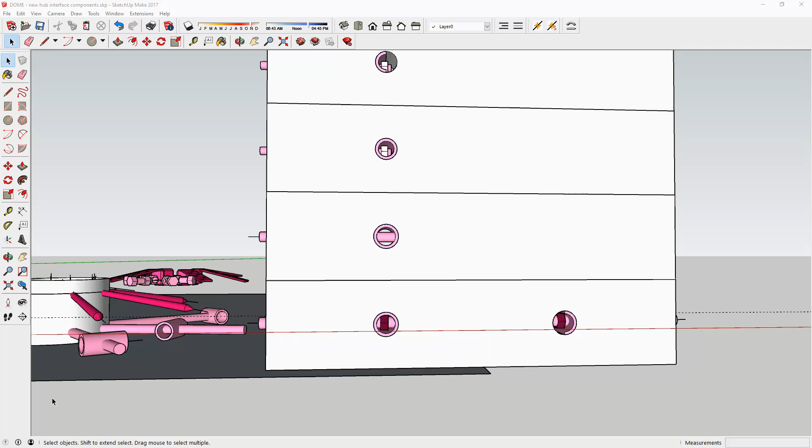Well, do you like my wall? It's not actually a wall, it's some sections of framing stacked on top of each other with representatives of the lower assembly components.

I posed the question to myself, is 12mm rod overkill? The answer, of course, is always going to be yes, but it also affords the aspect that if I want to make larger domes, I can, and why not try it with the larger dome type components that would be necessary. That was kind of what I was thinking. Other than that, it was just that I had some 12mm rod out in the garage and I was fiddling with it, and I thought, oh well, when I make my models I'll use 12mm rods. That was about as deep as my thought process went initially.

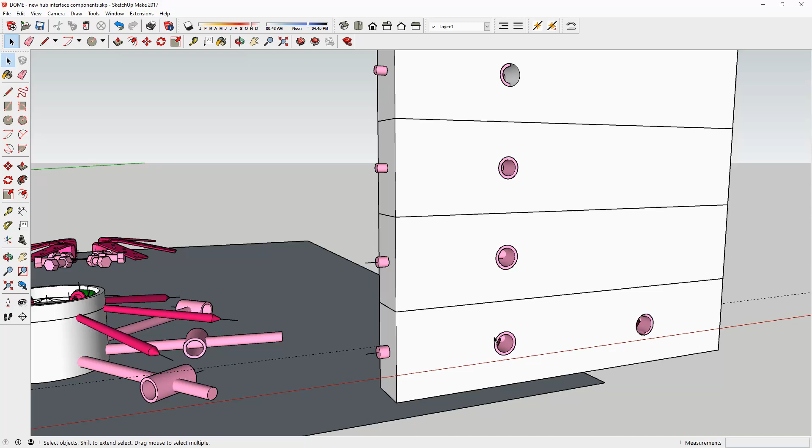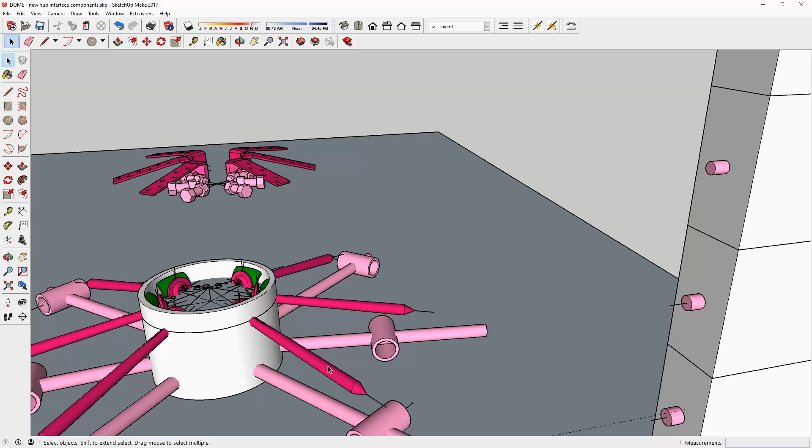But just the other day I was making the comment about whether to use the screws or the tabs, as we see the two options here, for the upper assembly parts. And it got me to thinking, these are serious screws. They are SPAX screws, as everyone knows I've been banging on about, and they are 140mm long for no other reason than I've got some 140mm long screws out of my garage. They are classed as a 10mm, but the 10mm is across the peaks of the thread, not the shaft itself. Just letting you know.

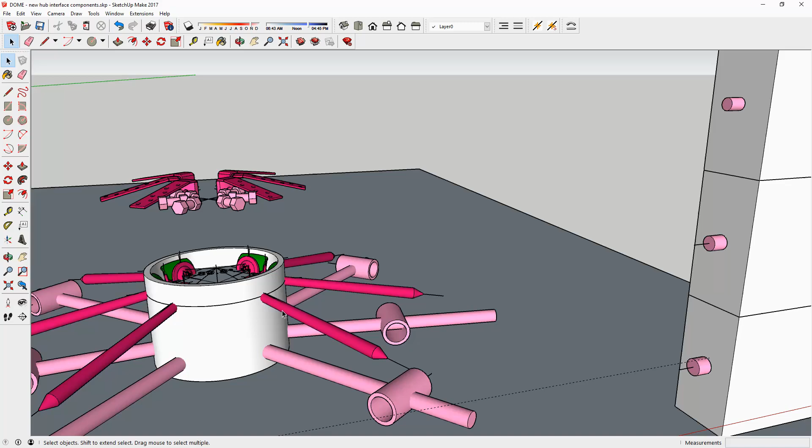And if that's not long enough, well, in New Zealand we can get them up to 450mm long. And yes, that would be too long. In Germany, apparently, they go up to 3 meters long. I saw a video of them installing one of those, and I thought, how do they guide that length of screw into the timber? Still got no answer for that one. I should look at the video again.

Anyway, that is not what we're here for today. It is, do we use a 12mm, a 10mm, or an 8mm threaded rod? I can't conceive of them breaking under normal load for the size dome I'm thinking of building, which is between 6 and 8 meters in diameter. That's not big in dome speak, but the style of dome is different from many of the others that are able to get away with much lighter fixings.

And in particular, we have the interface between the very bottom row of triangles, only 4 of them, and they act as legs, and they of course support and attach to the upper part of the dome. And it's that point, and yes, I know, self-confessed paranoid person here, that is the area at which I think we need to keep the 12mm rods, and we can get away with much lighter rods elsewhere.

The other side of it is, why not keep it all standard, except that you're going to be in the overkill category for this area of this component, but why make life hard for myself by changing out different components? So that's where I'm kind of pondering.

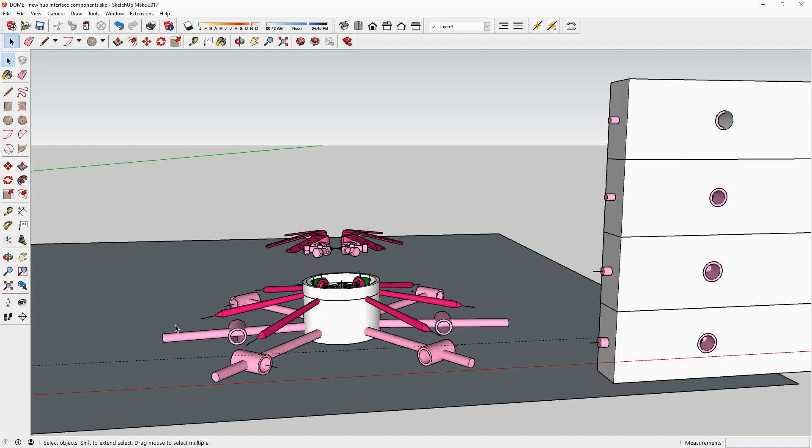However, because I've got some 8mm, 10mm and 12mm rod, I had a fiddle.

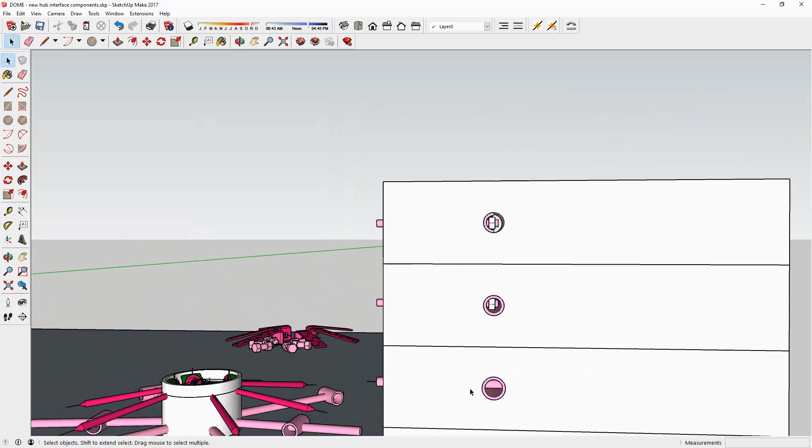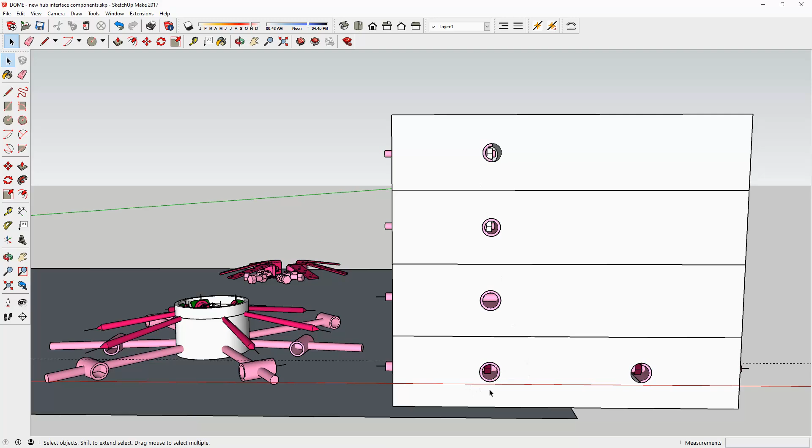This here is a much smaller hole. It's only about, let's measure it. It's 22mm. And it is, and I'm going to have to check that because let's just check that right now. This one here is 19. That's interesting. Why? Well, I know the pieces I've got out in the garage in my workshop, that all but fits inside that pipe.

I'll have to check on that. But what we're doing here is, I'm going to have to change that because that's actually a 10mm nut, and I was going to insert a 12mm nut in there, which works, and forego having to worry about threading the pipe, which was a serious consideration, and then that means I didn't need a nut at all.

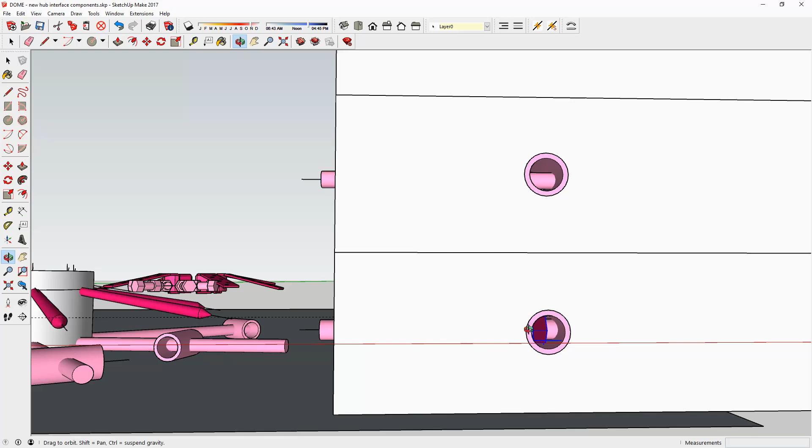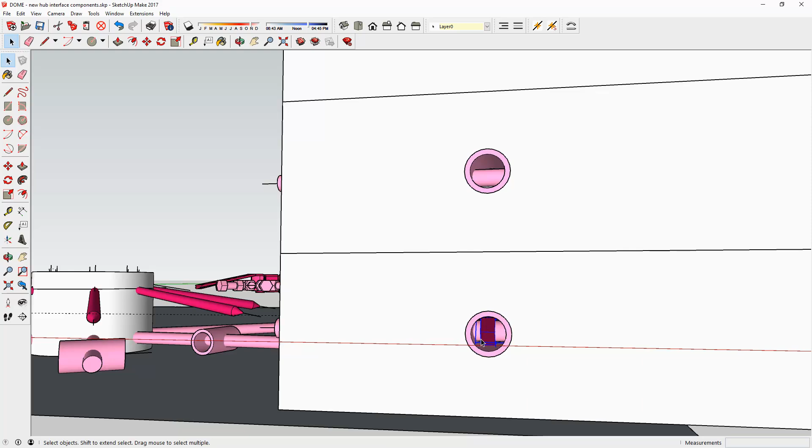But when I looked at it a bit more, I'm thinking, oh, hang on. I'm making the assumption that the threaded rod will go in perfectly into the thread of the pipe, and when I drilled it, I misaligned it ever so slightly between the two walls, and then when I went to thread it, I broke my darn tap. So immediately I thought, well, do I need to thread it at all? Can I get a nut inside the tube? And the answer is, yes, I can. And what's more, what happens if I do that?

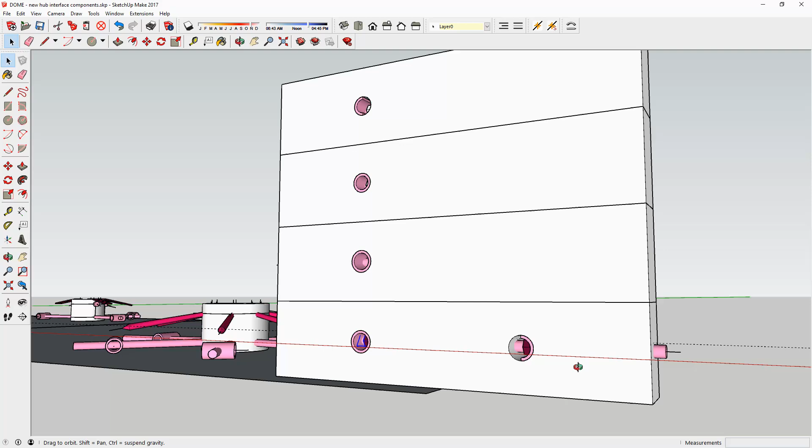Cut them in half, just like the interface blocks in the hubs themselves, which means one process, many uses or situations. I thought that might be a better way of doing it. It means that it's not a cost thing, it's more a practical side of how we construct it.

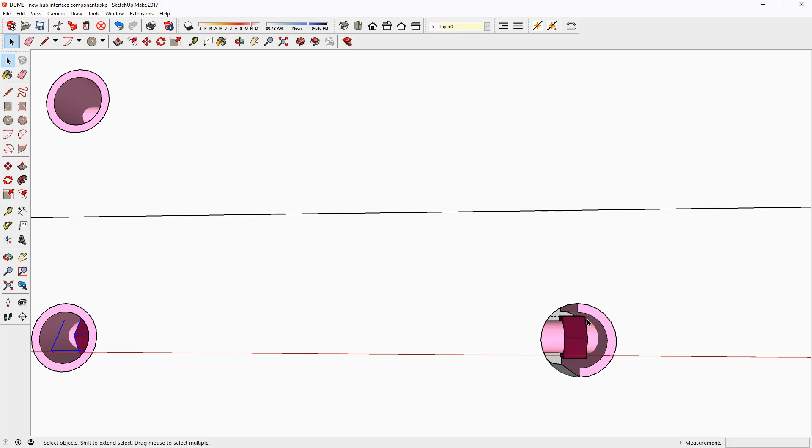This curved piece of pipe interacts with the hole drilled in the side of the strut, and the nut, the flanges, will bed up against the pipe, and we should be good. I can't see that loading up the nut sufficiently to cause damage. Engineer will tell me otherwise.

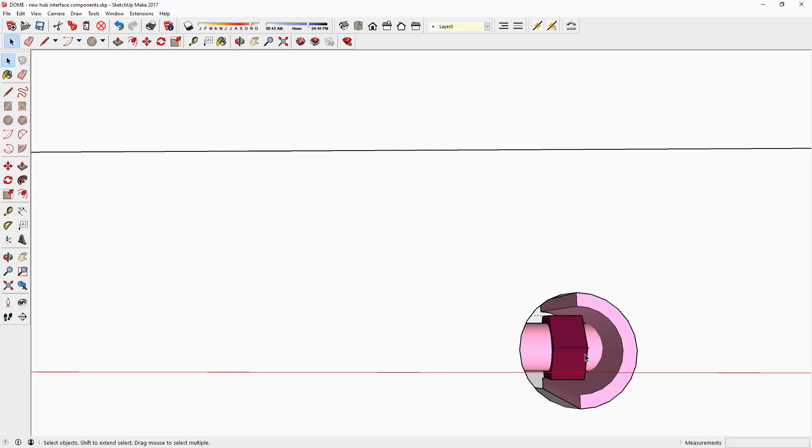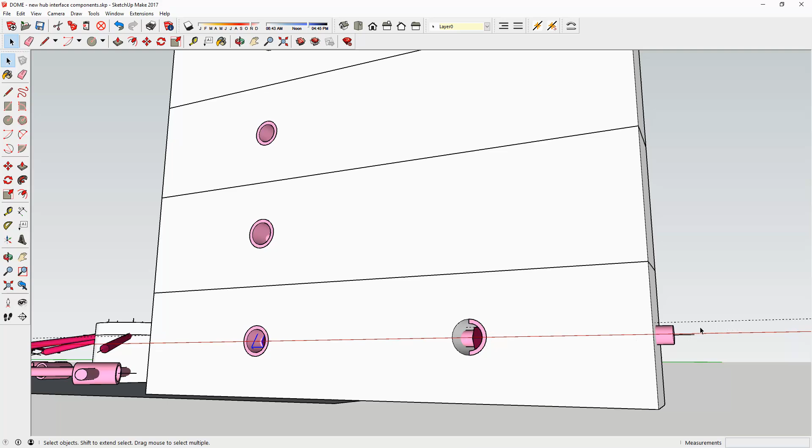I simply drill a slightly oversized hole there that gives me a little bit of wriggle room, and means that the alignment doesn't have to be 100% perfect for me to be able to drill a hole and then have it intersect in the right place for this bit of pipe. Because there's a good chance that by the time we come in the distance necessary, the hole could have wandered a little bit.

But I have spied a YouTube video talking about how to line bore a deep hole in the end of timber. And when you see how it's done, you think, of course, that is so simple. Well, straightforward. So that's a good thing, and I'll create a video on that at some stage as we progress along in this thinking.

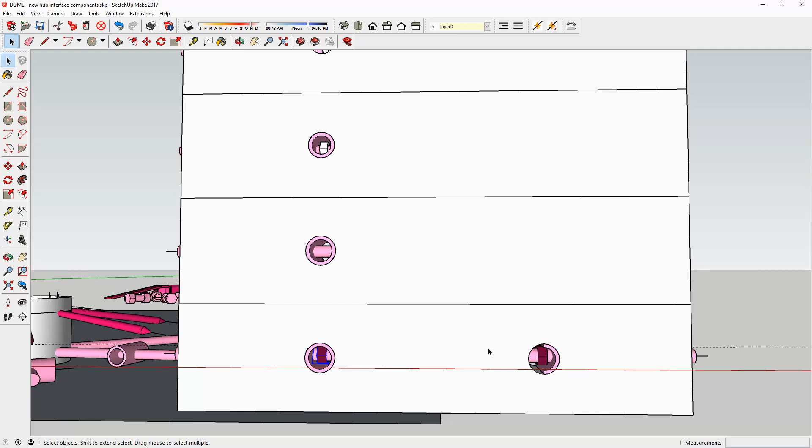10mm, same thing, put a nut inside the pipe, or 8mm, an 8mm cut in half of the pipe cut in half. Got the choices. I tend to lean towards keeping it chunky, because then I don't run the chance of...

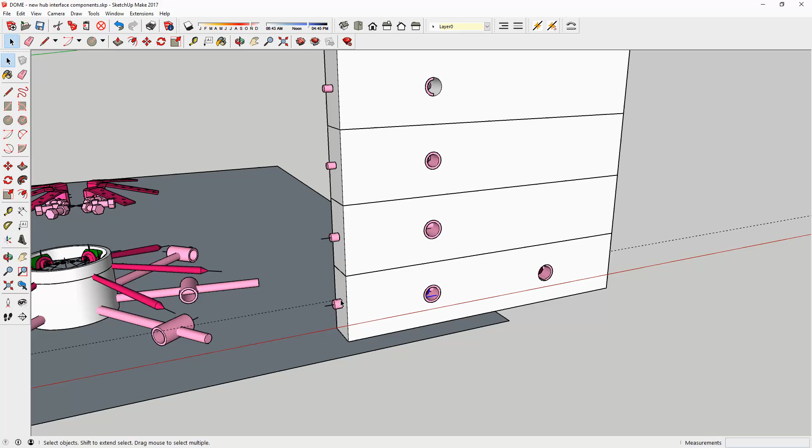Less parts able to be used in more places, and then we're away laughing.

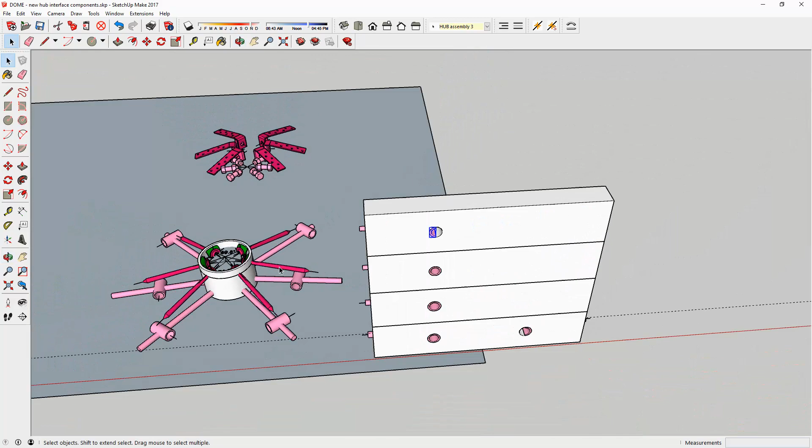But after all of that, this little piece here made out of a smaller pipe, I'm going to copy it - we may be able to use that similar sort of thing here vertically instead of horizontal, and cut to the shape of the inner surface of the hub. I can just turn it around vertically, and that can be my interface block for my straps should I decide to go down that route.

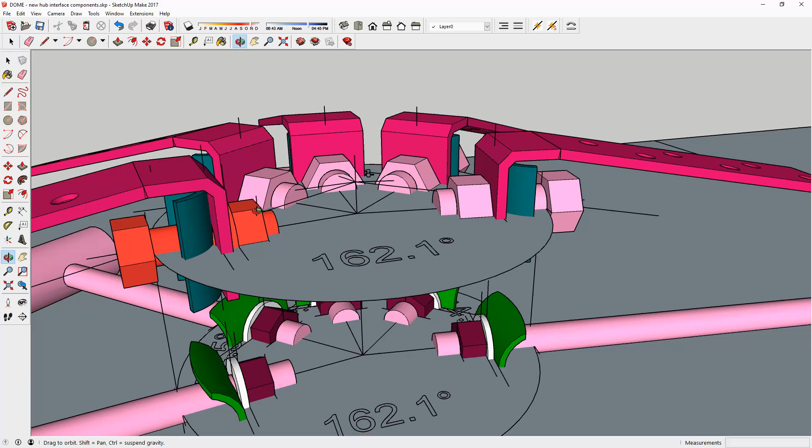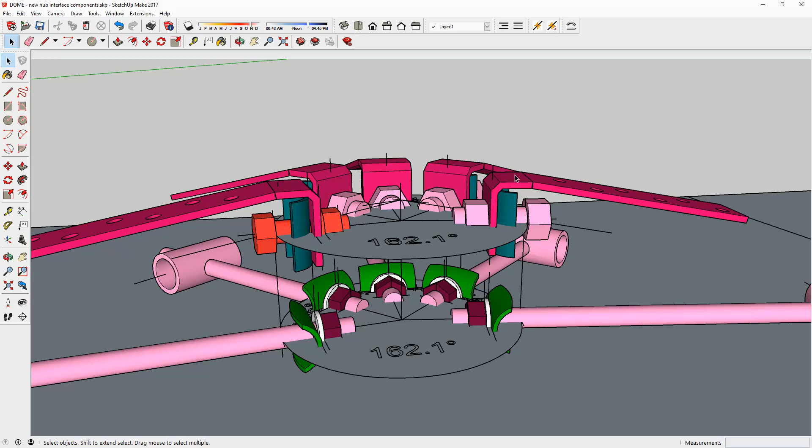Is it as strong as the flat blocks? No, can't be. But is it strong enough? Because this area here is the one that would see the least strain, says I. But that is just one more piece that I could cut a couple of hundred of, cut in half, and be able to use in all the different positions for the hub, bottom assembly, top assembly, and even in the strut themselves, just at different lengths and orientation.

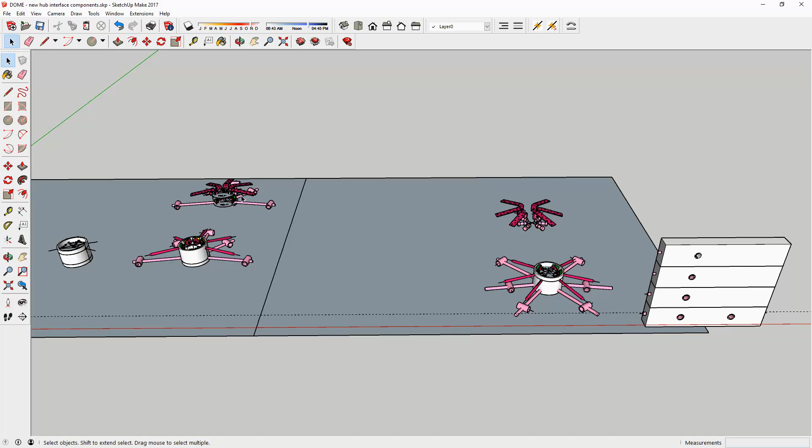So I've got a feeling that rather than try and make it too complicated, that might well take precedence over the other options available for consideration.

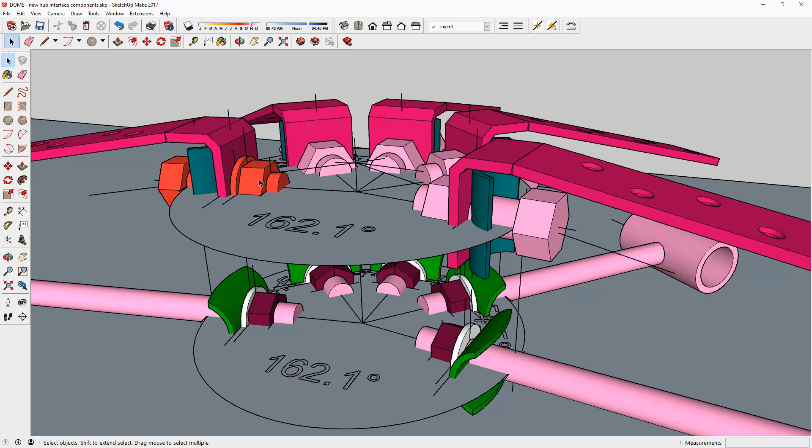Could be that these bolts can be 10 mil or 8 mil. I can't conceive of any loading being put on them that would stress them to the point of failure, but keep the heavier threaded rod for the bottom.

Thinking. Does a statement like that preclude critical thinking? And that is one of the things that we've come to with this project, is realizing that when we go through our design ideas, most of it is just guesswork. And in lieu of knowledge, what else can we go with?

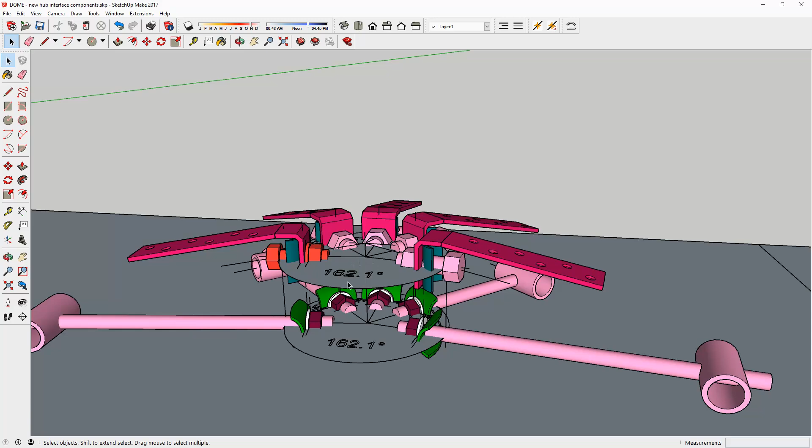I have done myself a disservice by not having posted these videos in a timely and sequential order on YouTube for people to then call me all the silly names and give me good advice. That is a shortcoming, I've got to say, and I'm now paying the penalty for it. So the remedy for that: start posting the darn things and let people comment and have at it and see whether I can keep up with the comments.